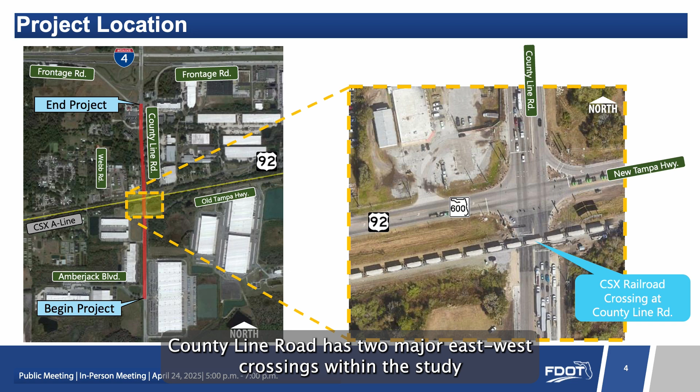County Line Road has two major east-west crossings within the study limits: CSX Railroad Line and US 92, or SR 600, or New Tampa Highway. The purpose of the proposed improvements on County Line Road is to improve safety, improve traffic operational conditions, and improve

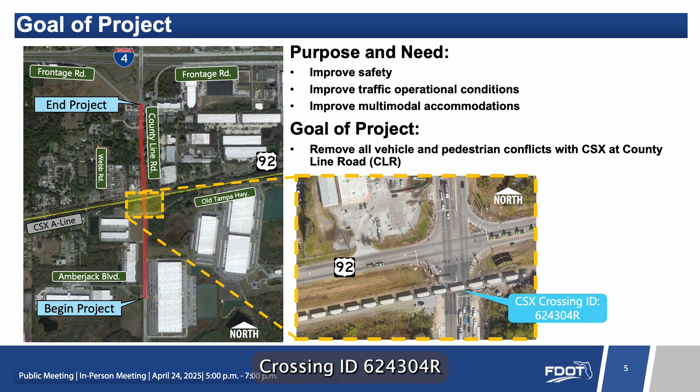multimodal accommodations. The proposed improvements to County Line Road would be focused on the existing at-grade CSX Railroad crossing, crossing ID 624304R, and the US 92 intersection, located approximately 75 feet north of the CSX Railroad crossing. The goal is to remove all vehicle and pedestrian conflicts with CSX Railroad on County Line Road.

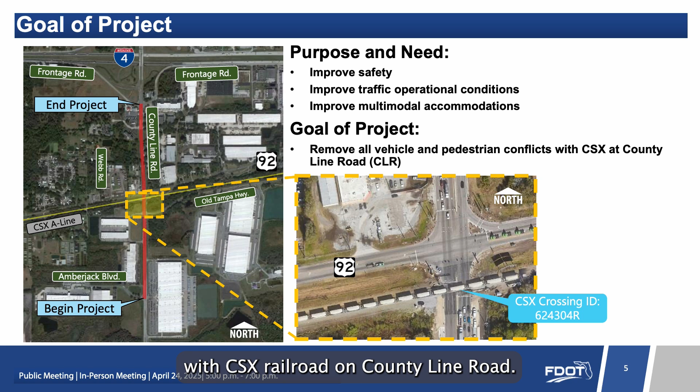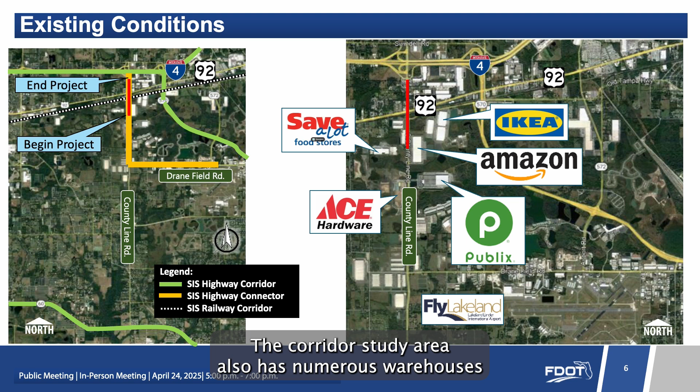County Line Road is designated a Strategic Intermodal System, or SIS, highway connector, and CSX Railroad is a SIS railway corridor. The corridor's study area also has numerous warehouses, like Amazon, IKEA, and Florida-based Publix Grocery, that provide the local area needed resources.

The County Line Road at-grade crossing experiences many delays caused by the railway traffic and buses or trucks that are required to stop, regardless of whether the gates are down. The CSX Railroad A-Line crossing on County Line Road is DOT crossing number 624304R, with 15 trains per day at a maximum speed of 79 miles per hour.

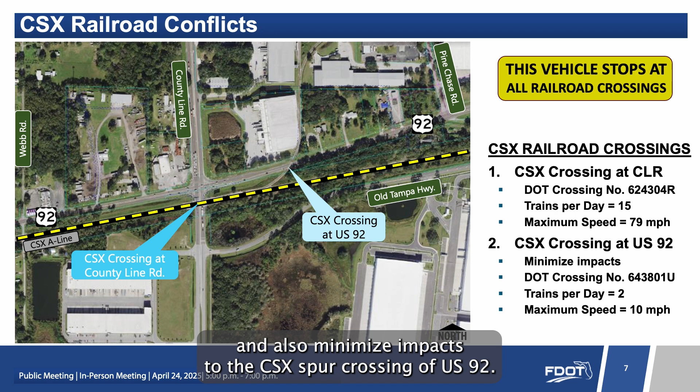The CSX spur crossing of US 92 is DOT crossing number 643801U, with 2 trains per day at a maximum speed of 10 miles per hour. The goal of this project is to remove all vehicle and pedestrian conflicts with CSX at County Line Road, and also minimize impacts to the CSX spur crossing of US 92.

At the intersection of County Line Road and US 92, the Polk County obelisk stands as a signal for travelers entering Polk County from Hillsborough County. The Polk County obelisk is located in the southwest quadrant of the intersection in CSX Railroad right-of-way. The obelisk is a potential cultural resource that will be evaluated as part of this PD&E study.

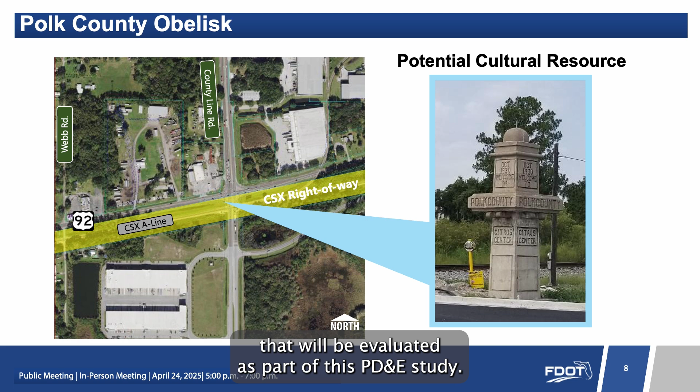Safety is a key consideration for this study. Based on the 5 years of crash data from 2018 to 2022, there were 421 crashes within the study area, and none resulted in a fatality. Over 48% of the crashes were rear-end crashes.

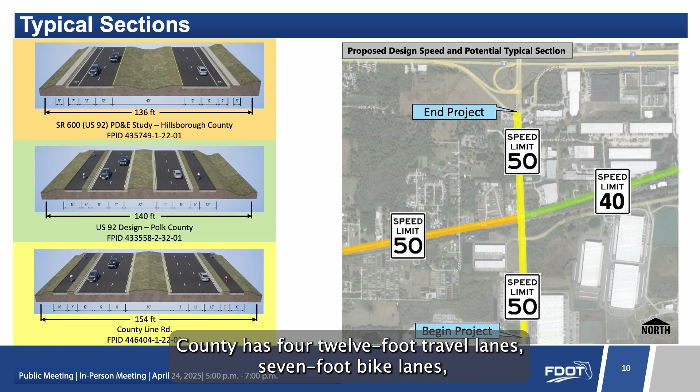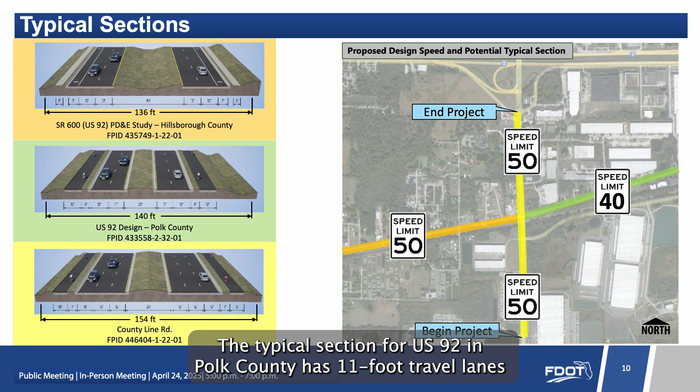The project has 3 typical sections. The US 92 typical section in Hillsborough County has 4 12-foot travel lanes, 7-foot bike lanes, and a 40-foot median within a 136-foot proposed right-of-way. The typical section for US 92 in Polk County has 11-foot travel lanes and 2 12-foot shared-use paths.

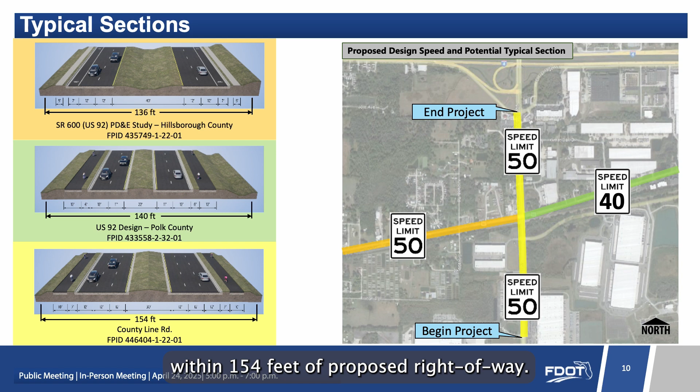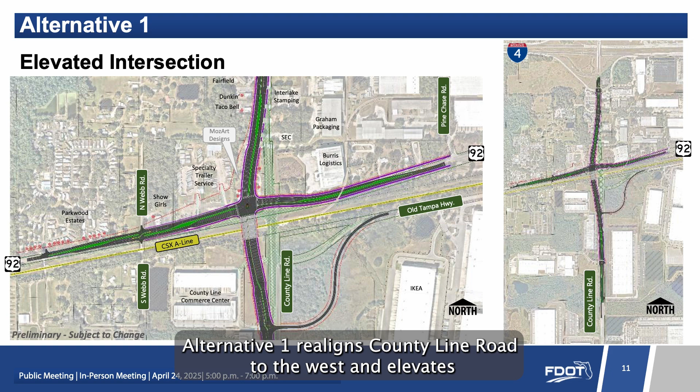County Line Road has a proposed typical section with 12-foot travel lanes and 2 10-foot shared-use paths within 154 feet of proposed right-of-way. 3 build alternatives have been developed for this study. Alternative 1 realigns County Line Road to the west and elevates both County Line Road and US 92 to an elevated intersection.

Alternative 2 is a quadrant roadway alternative, relocating County Line Road to the west with the quadrant roadway in the northeast quadrant. US 92 remains at grade with County Line Road elevated over both CSX A-Line and US 92.

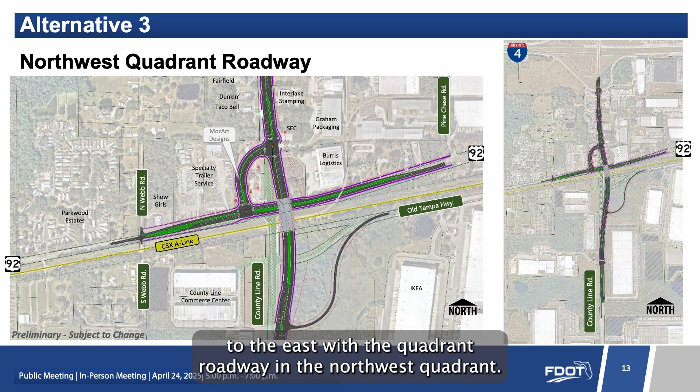Alternative 3 is a quadrant roadway alternative, relocating County Line Road to the east with the quadrant roadway in the northwest quadrant. US 92 remains at grade, with County Line Road elevated over both CSX A-Line and US 92.

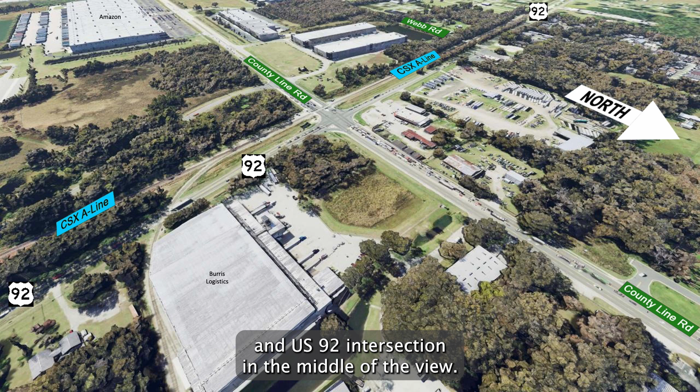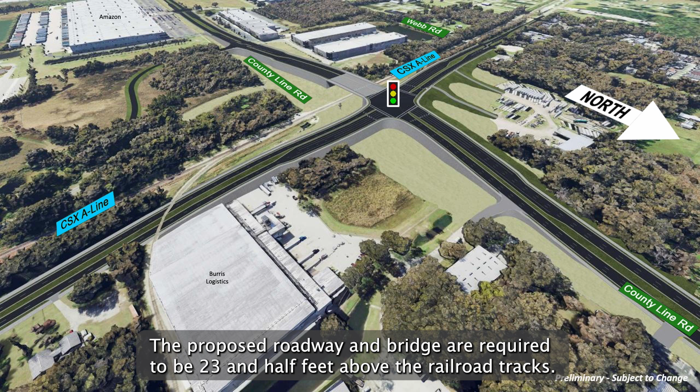This image shows the existing aerial view looking south with County Line Road and US 92 intersection in the middle of the view. Alternative 1 realigns County Line Road to the west and elevates County Line Road over CSX Railroad. The proposed roadway and bridge are required to be 23.5 feet above the railroad tracks.

Vehicles traveling westbound on US 92 wanting to go southbound on County Line Road will make a left at the intersection. Vehicles traveling eastbound on US 92 wanting to go southbound on County Line Road will make a right at the intersection.

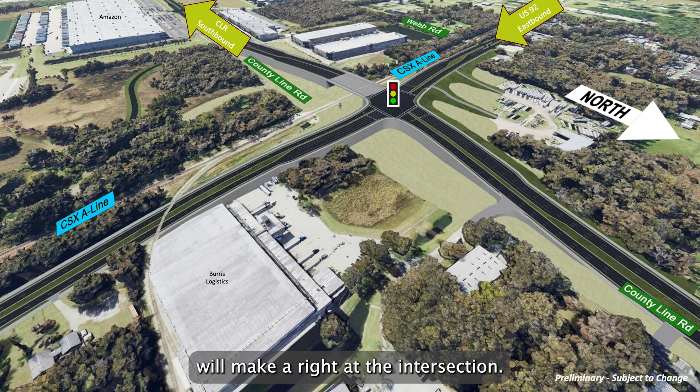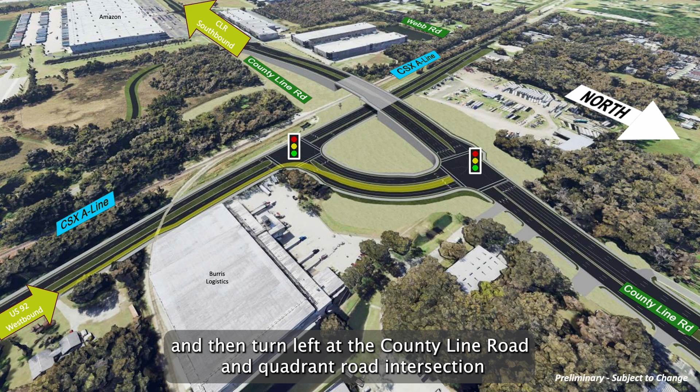Alternative 2 is a quadrant roadway alternative that realigns County Line Road to the west and is elevated over US 92 and CSX Railroad. Vehicles traveling westbound on US 92 wanting to go southbound on County Line Road will make a right turn at the US 92 and Quadrant Road intersection, then travel along the Quadrant Road, and then turn left at the County Line Road and Quadrant Road intersection to head southbound on County Line Road.

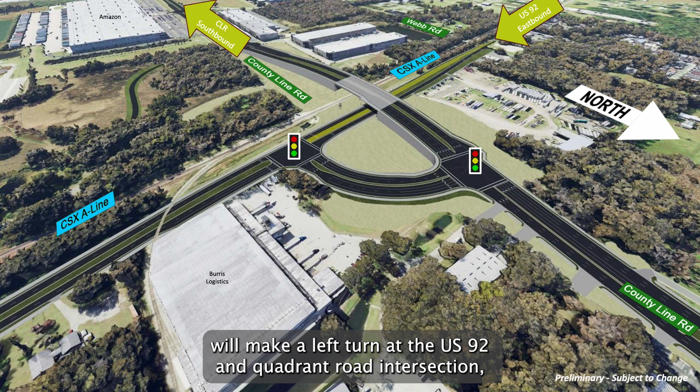Vehicles traveling eastbound on US 92 wanting to go southbound on County Line Road will make a left turn at the US 92 and Quadrant Road intersection, then travel along the Quadrant Road, and then turn left at the County Line Road and Quadrant Road intersection to head southbound on County Line Road.

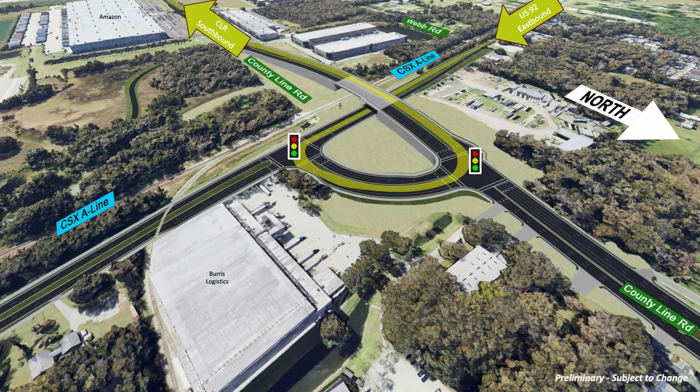An evaluation matrix showing a detailed comparison of the three alternatives and the no-build alternative is on display here this evening. The matrix shows potential effects on the social, cultural, natural, and physical environments and identifies preliminary costs. At this time, FDOT anticipates completion of this PD&E study by summer 2026. The study schedule is on display this evening.

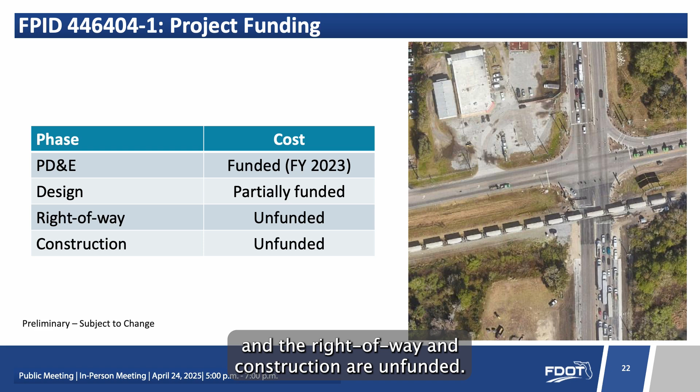Currently, the PD&E project is funded. The design phase is partially funded, and the right-of-way and construction are unfunded. We invite you to share your thoughts on the project, whether it's to express support, raise concerns, or ask questions. Your feedback helps the project team better understand your perspective.

Submitting a comment is easy, and there are 3 convenient ways to do that. First, provide the printed comment form at this meeting. Second, visit the project website and complete the online form. Use the website address or QR code to access the website.

Third, send comments by mail or email to Adam Rose, FDOT Project Manager, Florida Department of Transportation, P.O. Box 1249, MS 1-40, Bartow, Florida 33831. Email adam.rose@dot.state.fl.us. Please provide your comments by Thursday, May 8th, 2025, to be included in the official project record.

The Florida Department of Transportation is required to comply with various non-discrimination laws and regulations, including Title VI of the Civil Rights Act of 1964. Public participation is solicited without regard for race, color, national origin, age, sex, religion, disability, or family status.